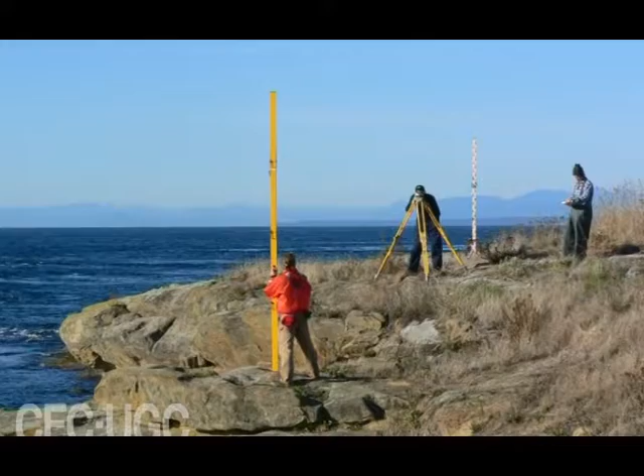Today let us discuss surveying. Knowing about the relative position of various objects, determination of distances between them, measurement of angles, measurement of height, determination of boundaries and relative heights of various points come under the purview of surveying.

It is very essential to mark the various points on the land, boundary lines of the proposed construction sites and levels, that are heights of the various locations, before starting the construction of a building, bridge, embankment, railway line, etc.

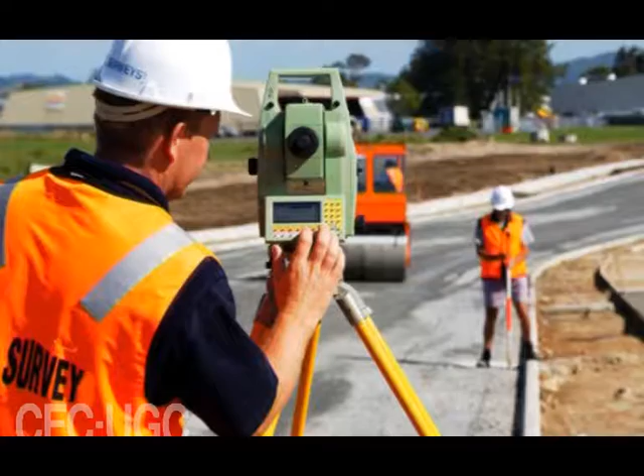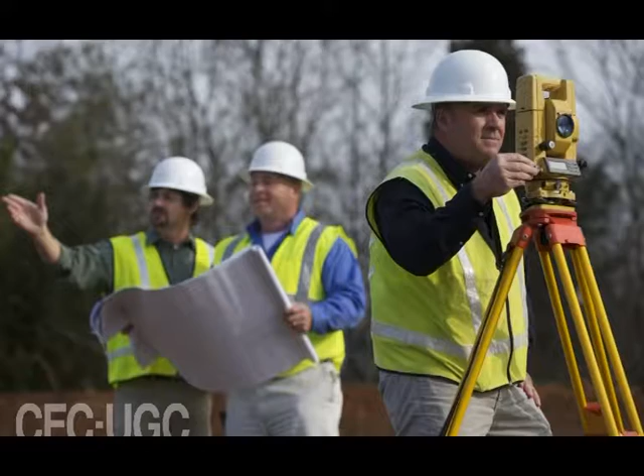After performing the measurements of the shape, size and location of objects on ground, the details are plotted on a drawing sheet. After the completion of the drawing, which may be one or more than one, describing the details, the construction process is started.

After determining the details of the soil strata below ground and bearing capacity of soil, which is called geotechnical survey, the depth of earthwork is decided by the engineer. All these things are interrelated and form part of the total survey network.

At first sight, the job of survey looks very simple, but it actually requires special knowledge about it and understanding of the job. The students who have studied or who have knowledge of mathematics and physics can acquire the knowledge about survey in a nice manner.

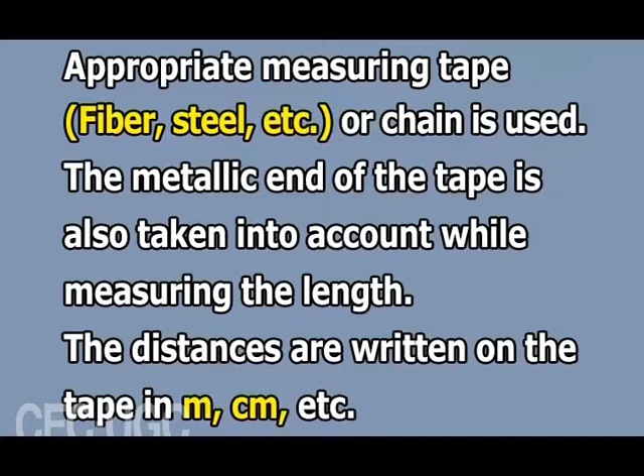The pace of development which is going on in India and throughout the world has increased the importance of survey related works. Now, how to make the measurement, especially the length? An appropriate measuring tape, that is fiber, steel, etc., or chain is used for this purpose. The metallic end of the tape is also taken into account while measuring the length. The distances are written on the tape in meters, centimeters, etc.

Now, let us see what are the types of surveying we can carry out. The types of surveying which are extensively being conducted are many. For example, contour surveys, land survey, city survey, topographical survey, route survey, mine survey, engineering survey, satellite imagery based surveys, geological survey, construction surveys, soil surveys, etc.

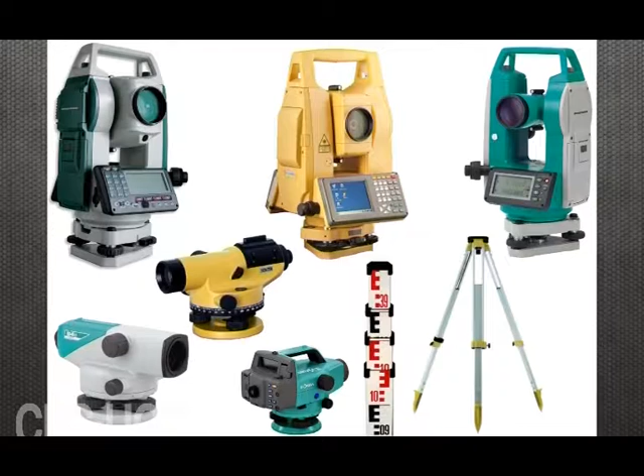Now, let us discuss dumpy level and plane table surveying. A dumpy level, also called a builder's auto level, which is a leveling instrument, or automatic level, is an optical instrument used to establish or check points in the same horizontal plane. It is used in surveying and building to transfer, measure or set horizontal levels.

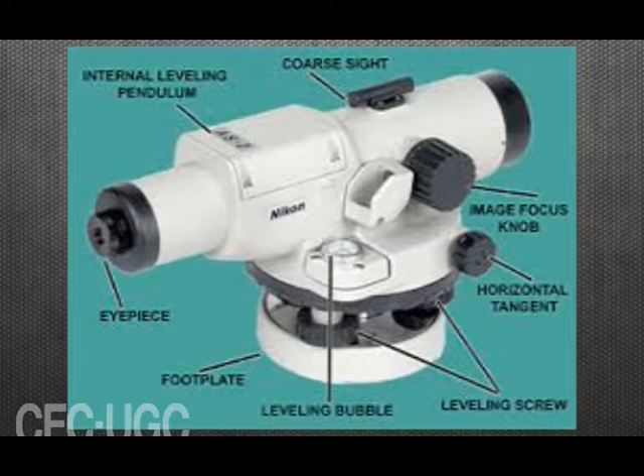In 1832, English civil engineer William Gravatt devised the more transportable and easier to use dumpy level. And how can it be operated? The level instrument is set up on a tripod and, depending on the type, either roughly or accurately set to a leveled condition using foot screws that are called leveling screws.

The operator looks through the eyepiece of the telescope while an assistant holds a tape measure or graduated staff vertical at the point under measurement. The instrument and staff are used to gather and transfer elevations during site surveys or building construction.

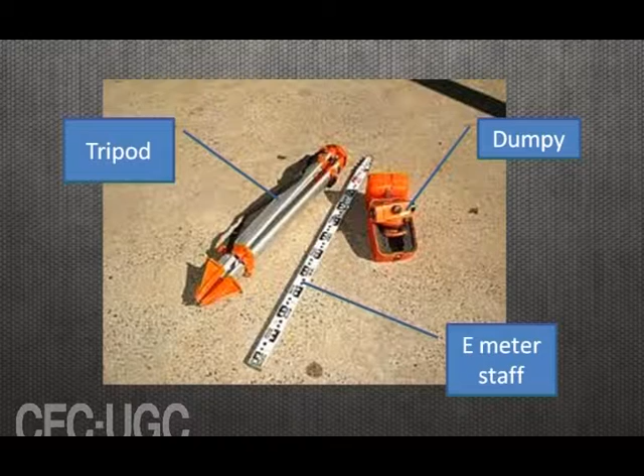Measurement generally starts from a benchmark with known height determined by a previous survey, or an arbitrary point with an assumed height. The term dumpy level endures despite the evolution in design. A dumpy level is an older style instrument that requires skilled use to set accurately.

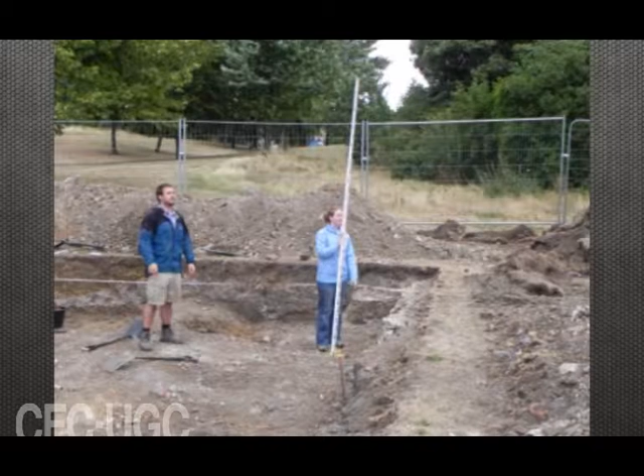The instrument needs to be set level, that is spirit level, in each quadrant to ensure it is accurate through a full 360 degree traverse. Some dumpy levels will have a bubble level ensuring an accurate level. A variation on the dumpy, and one that was often used by surveyors where greater accuracy and error checking was required, is a tilting level.

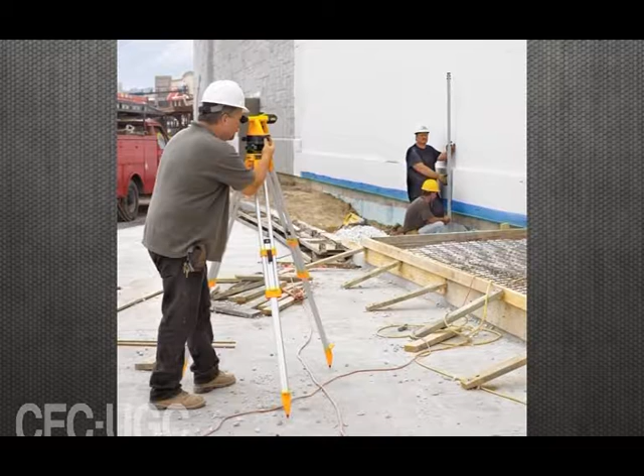This instrument allows the telescope to be effectively flipped through 180° without rotating the head. The telescope is hinged to one side of the instrument's axis. Flipping it involves lifting it to the other side of the central axis, thereby inverting the telescope. This action effectively cancels out any errors introduced by poor setup procedures or errors in the instrument's adjustment.

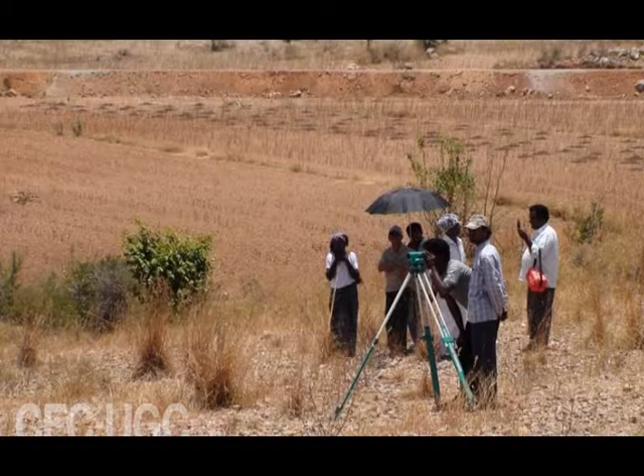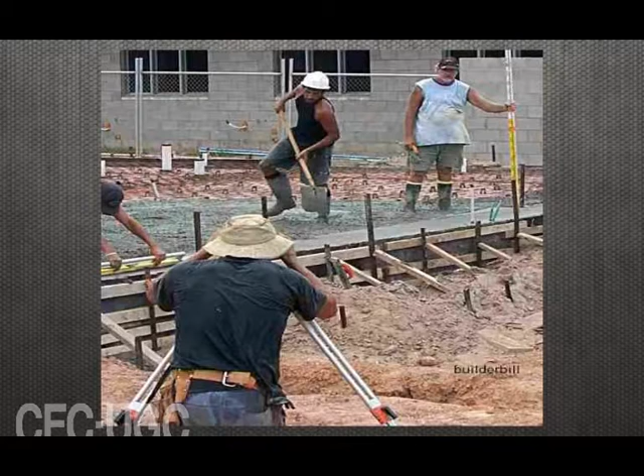As an example, the identical effect can be had with a standard builder's level by rotating it through 180° and comparing the difference between spirit level bubble positions.

An automatic level, self-leveling level or builder's auto level includes an internal compensator mechanism, that is a swinging prism that when set close to level automatically removes any remaining variation from level. This reduces the need to set the instrument truly level as with a dumpy or tilting level. Self-leveling instruments are the preferred instruments on building sites, construction and surveying due to ease of use and rapid setup time.

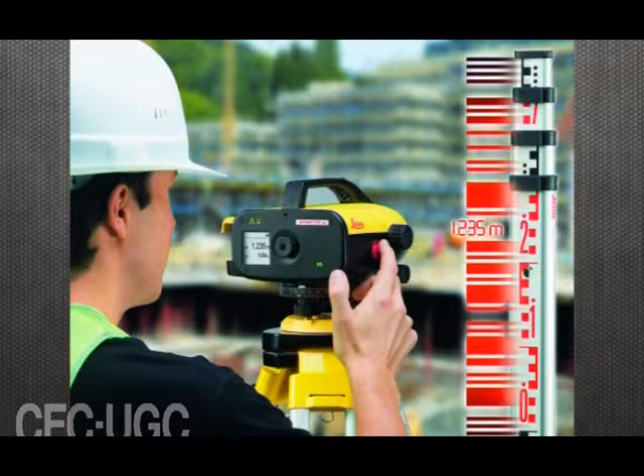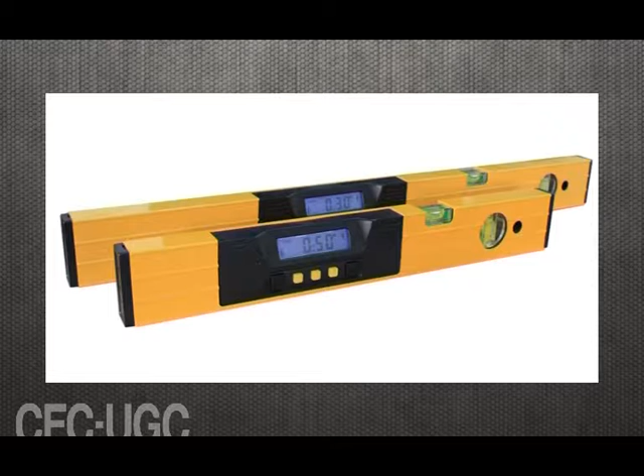A digital electronic level is also set level on a tripod and reads a bar-coded staff using electronic laser methods. The height of the staff where the level beam crosses the staff is shown on a digital display. This type of level removes interpolation of graduation by a person, thus removing a source of error and increasing accuracy.

During night time, the dumpy level is used in conjunction with an auto cross laser for accurate scale readings. More modern types of dumpy levels are still used by builders and contractors, but have been largely superseded for survey work.

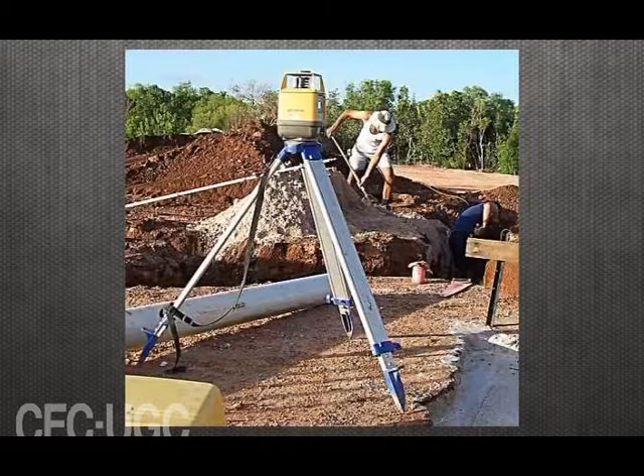Before the introduction of digital levels with electro-optical staff readings in the 1990s, a more common type of level was the automatic level, which is constructed in a manner similar to the dumpy level, in that the telescope is rigidly fixed to the vertical axis of rotation. However, the difference between the two is that automatic levels feature an optical mechanical compensator suspended under gravity, which automatically adjusts the line of collimation without the need of a level tube.

A dumpy level is an instrument used to measure, transfer or set horizontal lines. It is an instrument that is often used in surveying buildings. A dumpy level is used to establish relative height, distance and bearings from different parts of a site. Using this instrument requires a certain amount of skill.

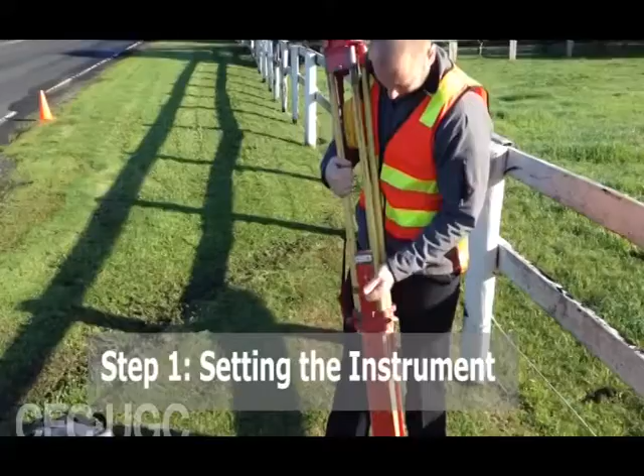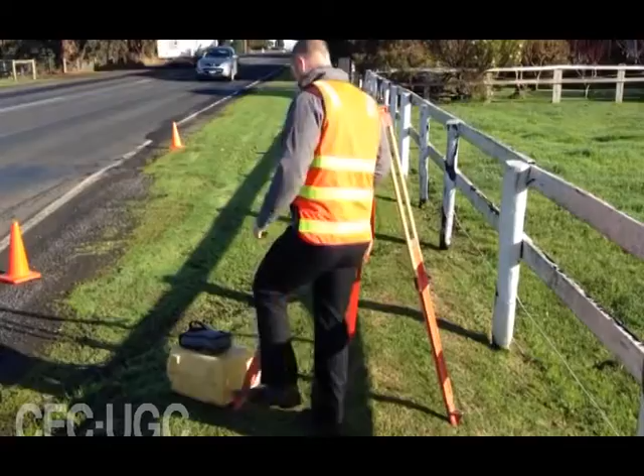Setting the instrument is important to make the dumpy level completely horizontal for it to work properly. Adjust the height of the tripod until it is eye level. Move the legs of the tripod so it is balanced and can hold the level properly. Once you are satisfied, secure the legs of the tripod by pressing it to the ground. Then attach the instrument to the tripod.

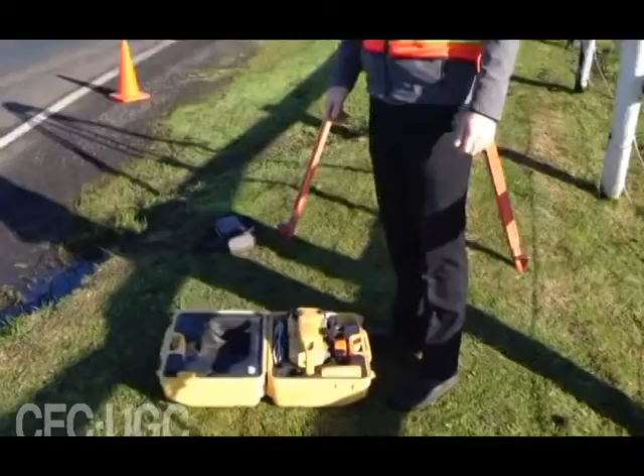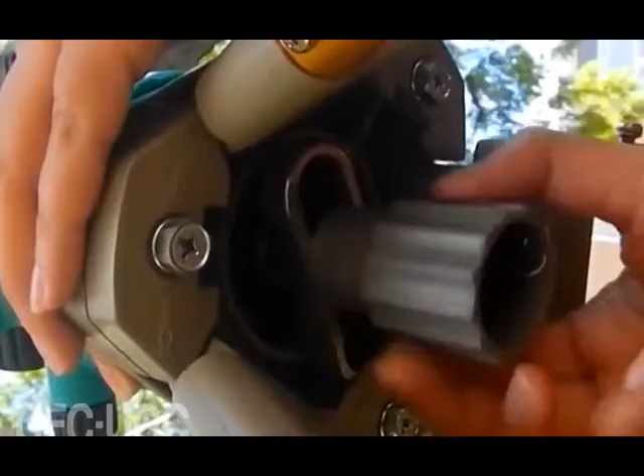The level is a very sensitive instrument, so take special care when you handle it. Set the instrument on top of the tripod, and at the center of the tripod is a large screw that you will use to screw in the instrument. On the side of the level is the bubble. Adjust the screws at the bottom of the level until the bubble is at the center of the marker. This is to ensure that the instrument is leveled.

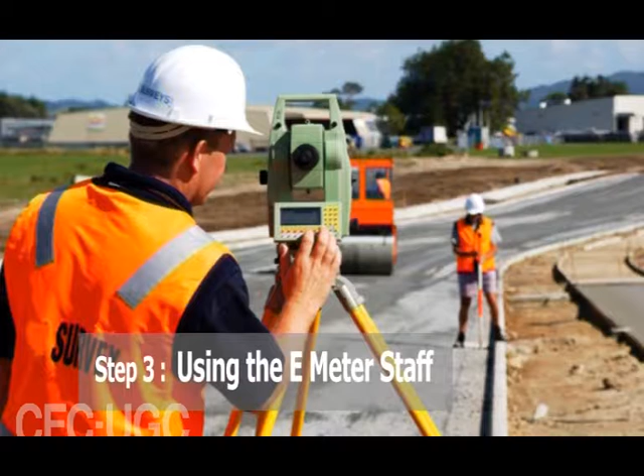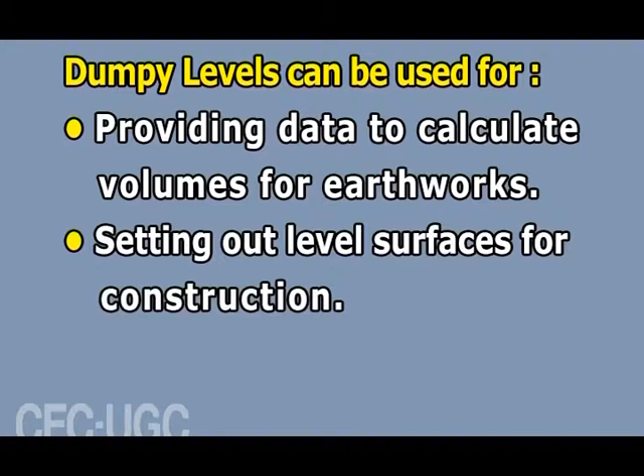Then using the E-meter staff, once the dumpy level is set, ask your assistant to stand a distance away while holding the E-meter staff. Dumpy levels can be used for determining the height of a particular point, determining differences in height between points, drawing contours on a land, providing data to calculate volumes of earthworks, setting out level surfaces for construction, and setting out inclined surfaces for construction.

Then measuring height using dumpy level. The place of which height is to be measured is called station. Height is always measured with reference to sea level. Survey of India established benchmarks at several places. Ideally, the distance should be taken from the benchmark.

If it is not available, then we can select a point on the map whose distance from sea level is known as the reference. We can fix any suitable point as a temporary benchmark and all heights can be measured from that point. We can fix any temporary benchmark, but if its MSL at the temporary benchmark is not sure, then before starting the surveying, the permanent benchmark reading should be clear.

The dumpy level is one of the most basic types of optical level instruments. It is used in surveying and building to find elevations which are known as levels. It can be used to set, measure or transfer horizontal levels. Some surveyors have replaced this older style of instrument with automatic levels, laser levels or other high-tech optical level instruments. One common variation of the dumpy level is the tilting level, which allows for less operator error. Surveying is used to find the height of buildings and earth topography.

This information can be used to make maps, set boundaries and gather information for builders. Measurement generally starts from a benchmark point, the height of which is known from a previous survey. The surveyor may also use an arbitrary point and estimate its height.

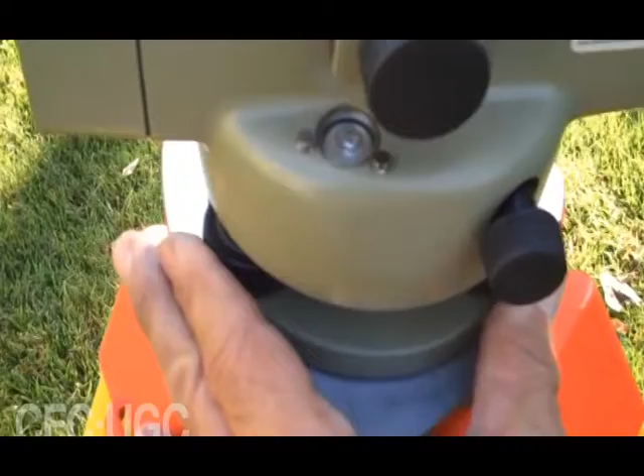The main body of a dumpy level is a telescope that swivels to take 360 degrees of measurement. Magnification power can range from 20 to 30 times. Many have spirit levels, the same kind found in simple construction straight edges, built into the base so the operator can clearly see if the device is level. When the bubble stays in the exact center, no matter how the telescope is rotated, the device is level.

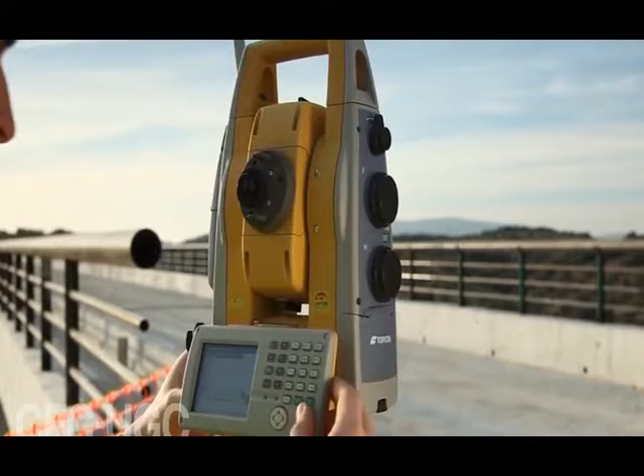3 leveling screws set over a foot plate allow the dumpy level to be minutely adjusted. Each quadrant of the level must be set in order to ensure an accurate reading no matter which direction the telescope is pointed. These levels are mounted on tripods to hold them at eye level and keep them stable during measurements. Finding elevation using a dumpy level takes at least 2 people, an operator and an assistant.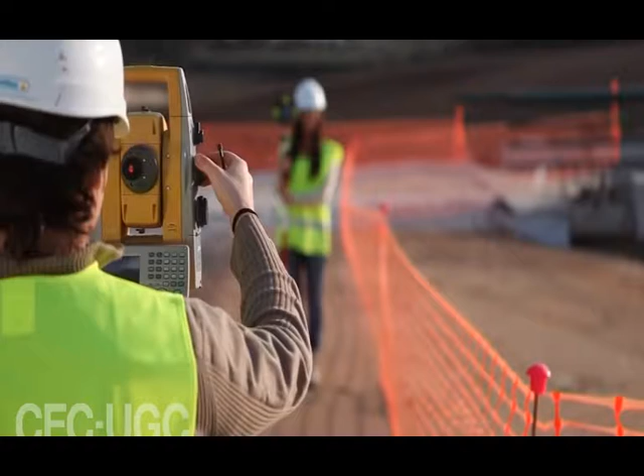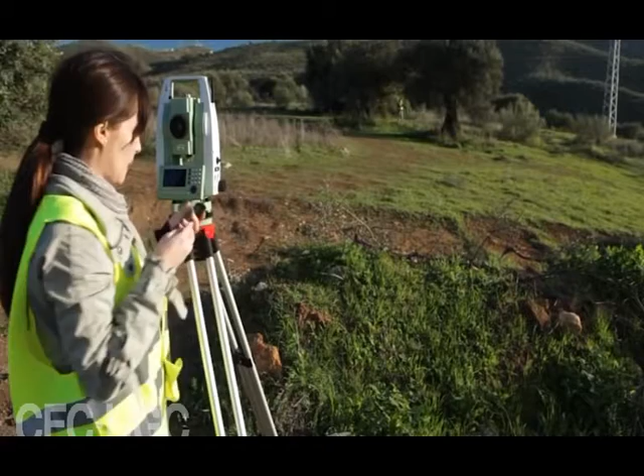The assistant holds a tape measure or marked staff called a leveling rod vertical to the point being measured. Meanwhile, the surveyor looks through the eyepiece at the target and the leveling rod. The operator takes measurements by comparing the marks on the leveling rod to the landscape. Several measurements of the same area can be used to find elevation, distance and other qualities of the landscape.

A tilting level is a type of dumpy level that allows for greater accuracy. Instead of being welded to the level, the telescope is hinged. This allows the eyepiece to be flipped 180 degrees without adjusting the head. As the level needs to be moved less, errors are less likely to occur. Now let us discuss plane table surveying.

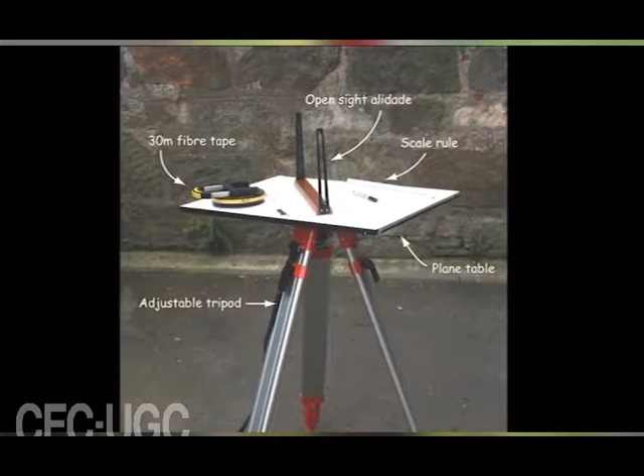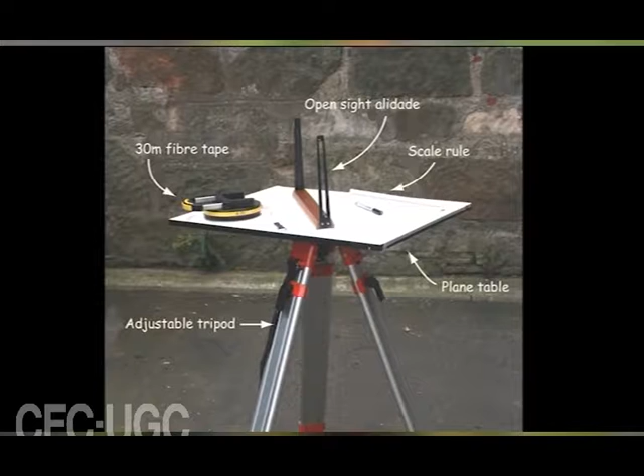A plane table, also popularly called a plain table prior to 1830, is a device used in surveying and related disciplines to provide a solid and level surface on which to make field drawings, charts and maps. The early use of the name plain table reflected its simplicity and plainness rather than its flatness. The plane table became a popular instrument for surveying.

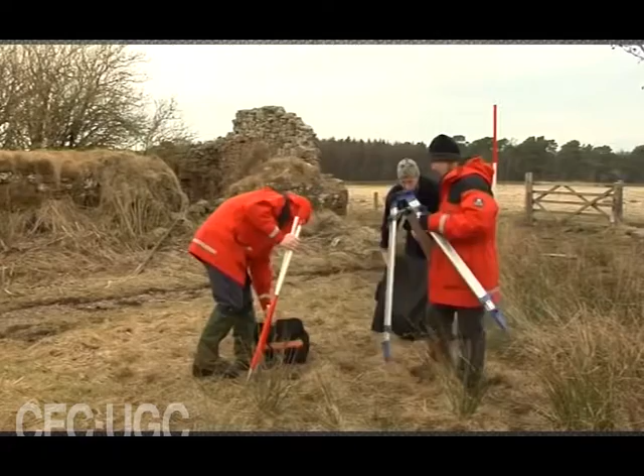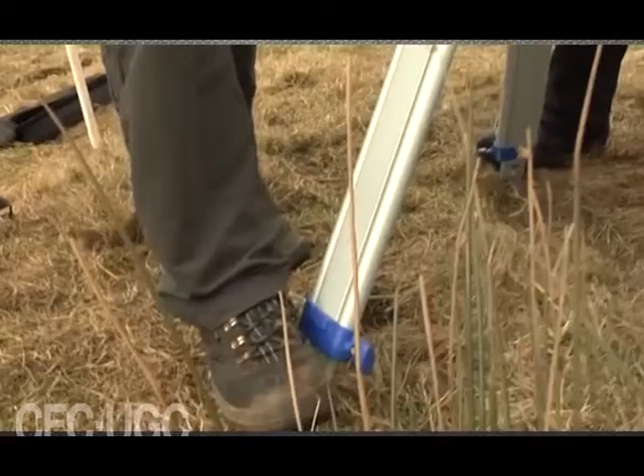The 3-point problem: the method is based on the fact that in a correctly oriented plane table, resectors through well defined points get intersected at a point which represents the location of the plane table station on the drawing. For example, X, Y and Z are well defined objects present in the field whose plotted positions are small x, y and z. Now, if the plane table is oriented correctly, the three resectors, Xx, Yy and Zz, get intersected at P, which represents the location of the plane table station P on the drawing sheet.

Thus, through solution of the 3-point problem, both orientation and resection of the plane table get accomplished simultaneously. There are several methods for solution of the 3-point problem: trial and error method, mechanical method, graphical method, analytical method and geometrical construction method. Of these, the trial and error method is easy, quick and accurate.

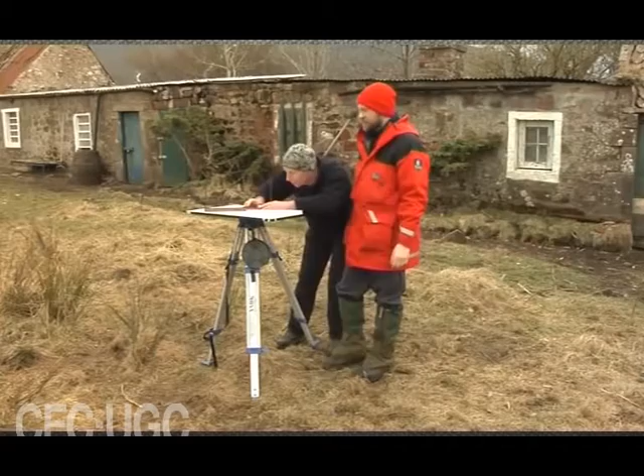It is commonly used in practice and hence has been discussed in detail. Uses of a plane table. In use, a plane table is set over a point and brought to precise horizontal level. A drawing sheet is attached to the surface and an alidade is used to sight objects of interest. The alidade, in modern examples of the instrument a rule with a telescopic sight, can then be used to construct a line on the drawing that is in the direction of the object of interest.

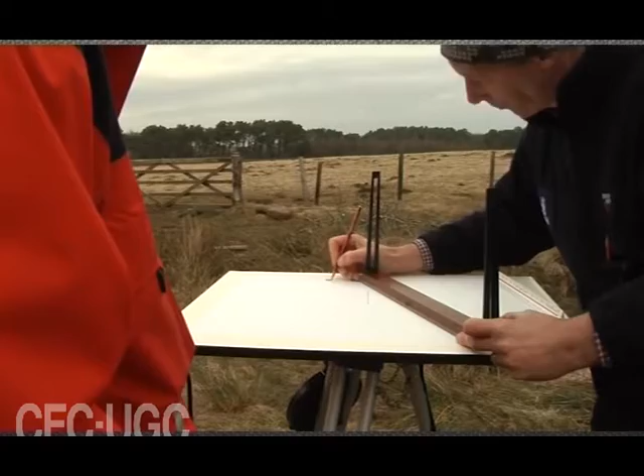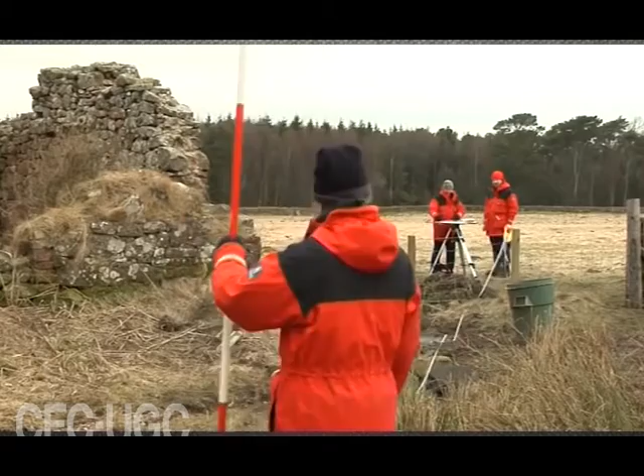By using the alidade as a surveying level, information on the topography of the site can be directly recorded on the drawing as elevations. Distances to the objects can be measured directly or by the use of stadia marks on the telescope of the alidade. Plane table surveying is a graphical method of surveying in which field work and plotting are done simultaneously in the field. The plane table consists of the following: drawing board mounted on a tripod.

The board is made up of well seasoned wood and varies in size from 40 centimeter by 30 centimeter to 75 centimeter by 60 centimeter or 50 to 60 centimeter square. Straight edge called an alidade. The alidade consists of metal or boxwood straight edge or ruler about 50 centimeter long. The beveled edge of the alidade is called the fiducial edge.

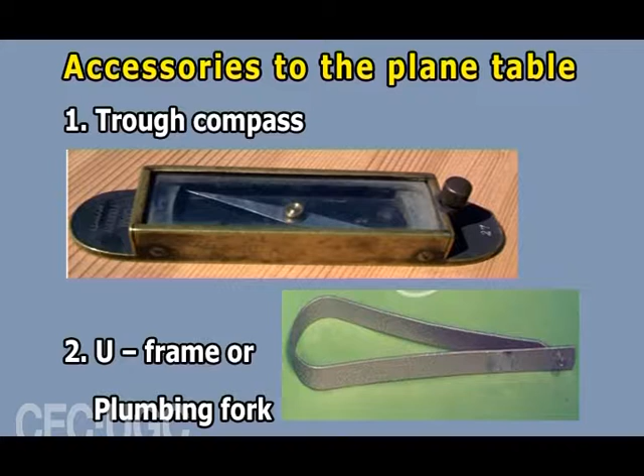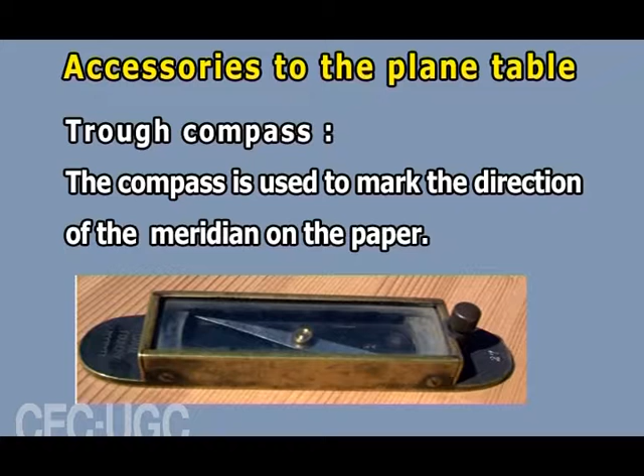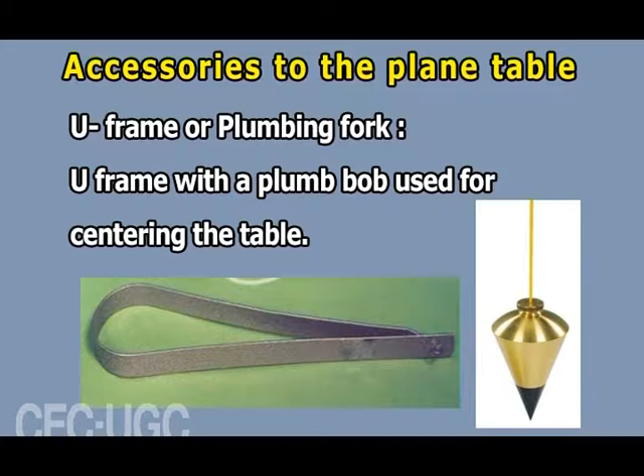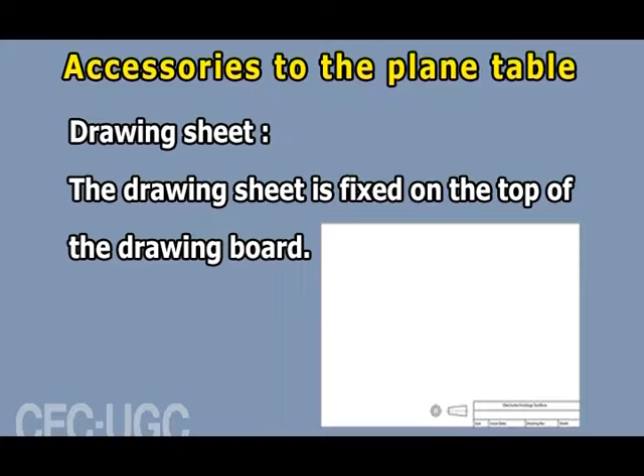Accessories to the plane table are trough compass, U-frame or plumbing fork, spirit level or level tube, drawing sheet, then pencil and eraser. Now, see, the compass is used to mark the direction of the meridian on the paper. U-frame or plumbing fork, that is U-frame with a plumb bob, is used for centering the table. Spirit level or tube, that is a level tube, is used to level the plane table. Then drawing sheets are fixed on the top of the drawing board. Then pencil is used for constructing lines and eraser is used for erasing the lines after completion of the plan.

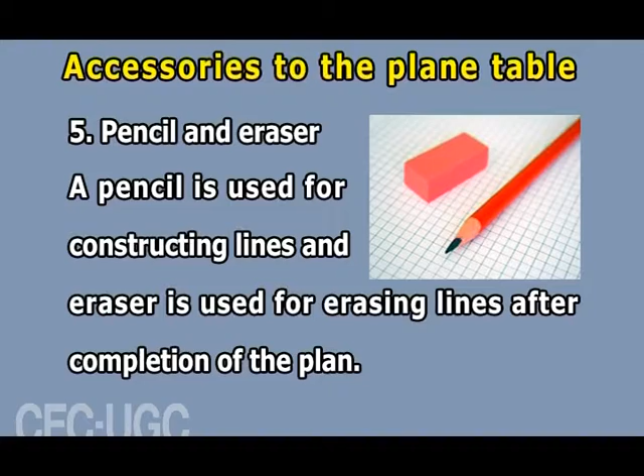Then setting up the plane table. The setting of the plane table includes the following three operations. They are centering the plane table, leveling the plane table, then orientation of the plane table. Centering: the plane table should be set up at a convenient height for working, say about 1 meter. The legs of tripod should be spread well apart and firmly fixed into the ground. The table should be approximately leveled by tripod legs and judging by the eye. Then the operation of centering is carried out by means of U frame and a plumb bob. The plane table is exactly placed over the ground station by U frame and plumb bob.

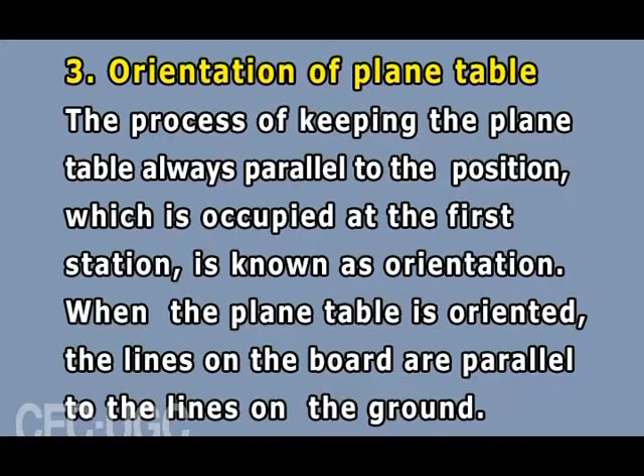Then leveling the plane table. The process of leveling is carried out with the help of level tube. The bubble of level tube is brought to center in two directions which are right angles to each other. This is achieved by moving legs. Then orienting the table. The process of keeping the plane table always parallel to the position which is occupied at the first station is known as orientation. When the plane table is oriented, the lines on the board are parallel to the lines on the ground.

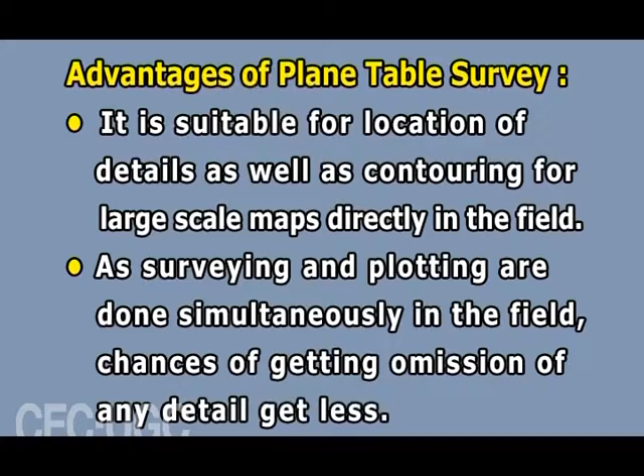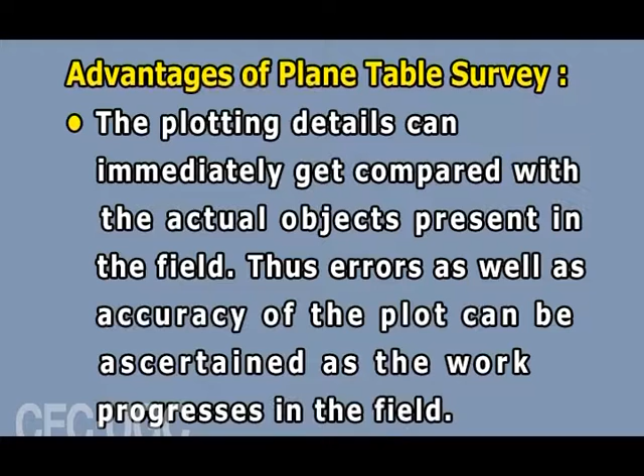Advantages of the plane table surveys are: it is suitable for location of details as well as contouring for large scale maps directly in the field. As surveying and plotting are done simultaneously in the field, chances of omission of any detail get less. The plotting details can immediately get compared with the actual objects present in the field. Thus, errors as well as accuracy of the plot can be ascertained as the work progresses in the field.

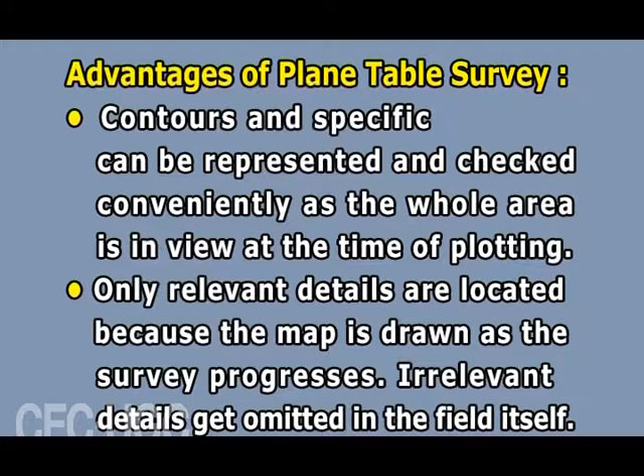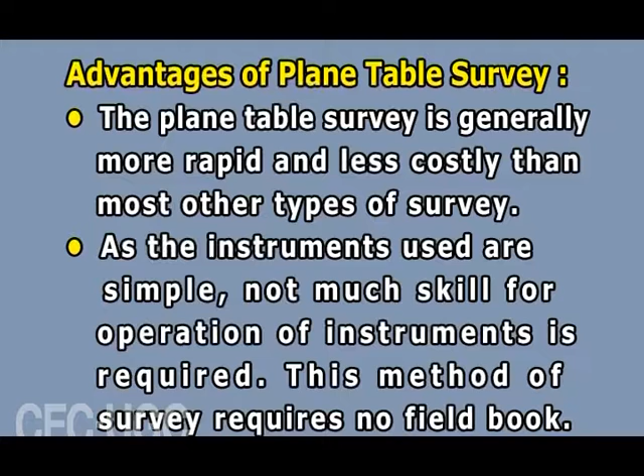Contours and specific features can be represented and checked conveniently as the whole area is in view at the time of plotting. Only relevant details are located because the map is drawn as the survey progresses. Irrelevant details get omitted in the field itself. The plane table survey is generally more rapid and less costly than most other types of survey. As the instruments used are simple, not much skill for operation of instruments is required. This method of survey requires no field book.